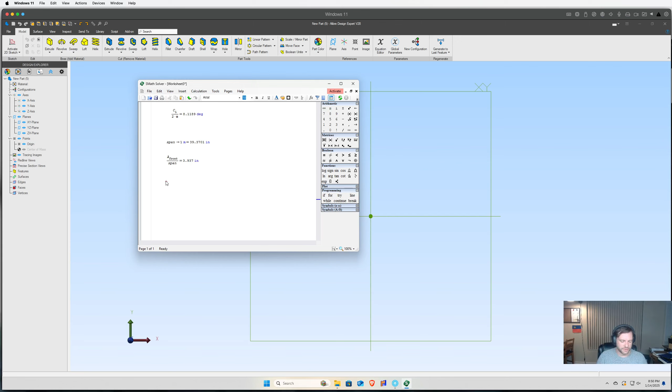And then we got to think, what's roughly the size of the width of the foil here? And I know just from looking around, it's not uniform. The width of the wing gets really narrow at the tip. Again, we're going to assume it's uniform right now, and we'll just say it's a thickness of the wing, thickness of the front. Actually, I should probably call this the span of the front, just to be sure, and correct that wherever I change it. And the thickness of the front, we're just going to say it's 1 centimeter, which in inches is 0.39 inches thick. Okay. So that's roughly at the thickest point.

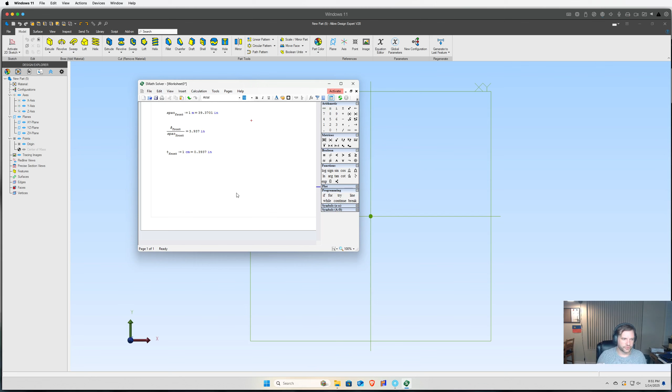And we could go look up cross sections of things and look at a whole bunch of data and try to calculate this thing exactly. But I think I'm going to take a shortcut for simplicity's sake, and we will say that we're going to have kind of a rectangular cross-section wing, because it's not going to be completely uniform at cross sections. It's gonna be thicker at the front and thinner at the rear usually to make a good airfoil or hydrofoil. So it's gonna be kind of a wedge shape, but we're gonna take a really first crack and say, you know what, we're just gonna approximate it as a rectangular beam right now.

So that's a really rough approximation, honestly. It's not great. So if you look at this wing here, edge on, it's going to kind of look more like a flat plate. And again, we're going to eventually need to correct this.

Here, let me drop this line weight so we can actually see what's going on. So we'll say this line weight is equal to 2. There we go. And I kind of want to get this to be the same. So we're looking at our model here. It's a really thin rectangular beam.

What we'll then say is that we need the moment of inertia of this thin rectangular beam, and it's going to be 1/12 times the base of the front times the height of the beam cubed, because there's a cubic relationship with that thickness. And we'll say the base of the front is the A of the front divided by span of the front. We already calculated that before.

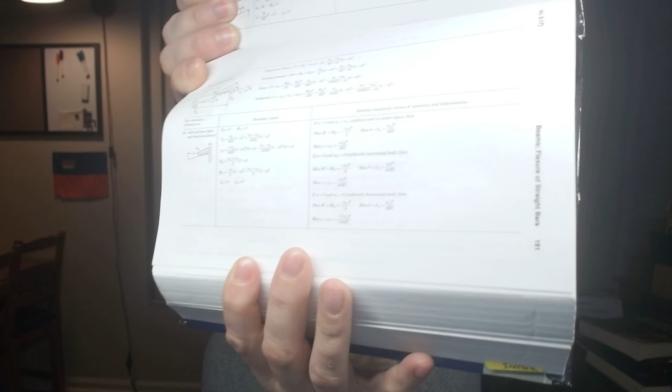Let's see if we get some camera action that can actually see. Ooh, maybe we can see. I'm holding it in the wrong place. The glare isn't great with this light, but you can get the idea.

You look up the formula for a beam in Roark's, and that tells us with a fixed beam, so really it's half the span. So I'm just going to say the half span is equal to span of the front divided by 2, just so I don't forget. It says if there's a uniform load on the entire span, then our formulas get really simple. We get our max deflection, which is what we're after, and it's really a function of the load per length.

So W, which is the load per length of the front, is going to be the weight divided by span of the front, at that first approximation. That's going to be in pound force divided by inches. It's been a long day. So 5 pound force per inch of span is what this thing is supporting.

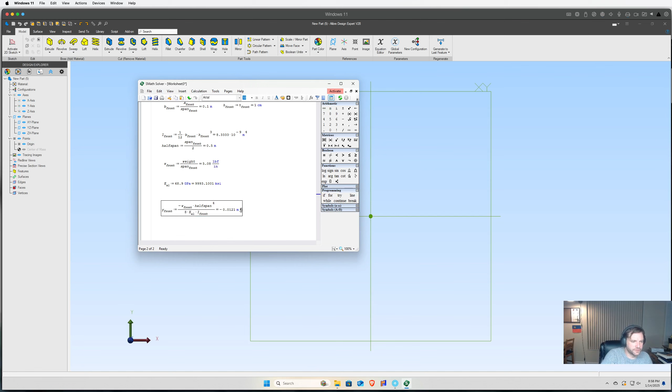All right, so that tells me right there, what's that? Oops. We get a deflection of the wingtip, effectively. We're expecting in inches. Ooh, so we get about half an inch of deflection at the wingtip from that load. So we're talking, you know, that much deflection. Is that good or is that bad? Not sure yet. Half an inch of deflection, is that going to change greatly what happens to the flow? Is that going to greatly change the shape of the wing?

And this is something you have to think about with any kind of problem. You can't just say half an inch of deflection is small. Well, if this was near a gap that was only a 1/4 inch gap or so, this would close that gap. So your model, your idea of reality is just not sufficient to understand that. And now your flow is sensitive to your deflection. That comes up in heat exchanger design and things like that, or any kind of internal flow where a small deflection could actually greatly change your whole flow.

Because this is an external flow problem where the water isn't bound usually. You're not usually flying right above the water or the ocean floor or riverbed within like a span. You are close sometimes to the surface of the water, which can matter. But let's say if you're flying this wing right below a very, very flat surface and you're half an inch below the surface of the water, those wingtips would then breach. And so that deflection of that wing would actually affect the whole flow. But that's kind of an extreme case.

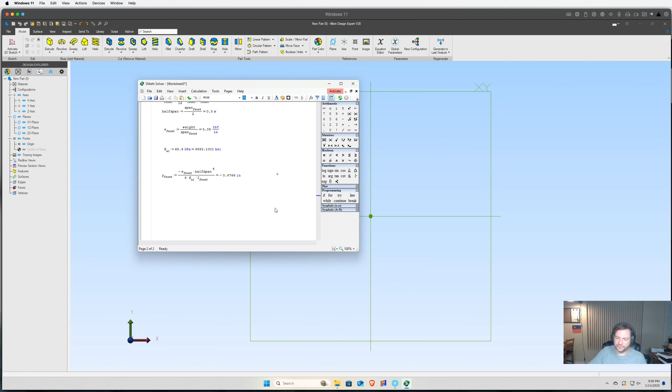We'll say maybe half an inch is okay. Maybe it's not. I don't know. I really don't know yet. We would have to go through the rest of this to figure it out. But there is something else that we want to look at, and that is another one of my favorite books. And I'm going to change the view again and try to remember to go back to the composite view here. Formulas for Natural Frequency and Mode Shape.

This is Blevins. I actually met the author of this. He is a very interesting fellow. One of my books actually got signed by him.

So we'll look at that and we'll say, well, we'll get the same situation where we have a simple beam. It's fixed on one end and it's free on the other, also using the half span, and we'll find its natural frequency. And I'll look at the first modal frequency of the front. So that's F1. We'll just call that F1 of the front. And that's going to be something called lambda 1 of the front, and we take the square of that. This is just a formula straight from the book.

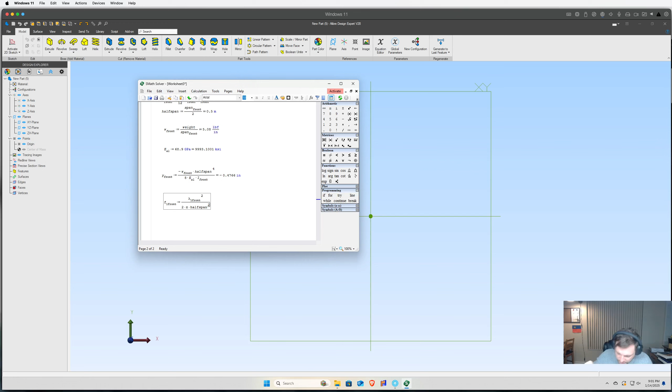Over 2 times pi times the length, which is going to be the half span, squared. And then all this, you get to multiply, if I do the multiplication right, by the square root of E, which we're saying is, I did something weird there, E of aluminum times I of the front, which is the moment of inertia of the front. And that's going to be divided by M of the front.

And it will not compute it because we didn't tell it what lambda was nor what M of the front was. So, excuse me. Lambda is effectively just a shape factor for determining the frequency. And so what that is, it's lambda 1 of the front. It's for a clamp-free beam, so that's 1.875. There's some more digits there, doesn't really matter.

So we got that. Now we have to define M. And M is simply the mass per unit length of the beam. And for that, I need to know what the density of aluminum is. So density of aluminum, I can go back to the website here. And where did we define density? Boom. So 2.7 grams per cubic centimeter.

I need to make sure, this is the one thing I don't like: MathCAD automatically converts to units. This one doesn't, and it takes me a little bit to get used to remembering to always hit tab afterwards. So there we go. Hopefully that matches. 0.0975. Yes, it matches. Okay, we're good.

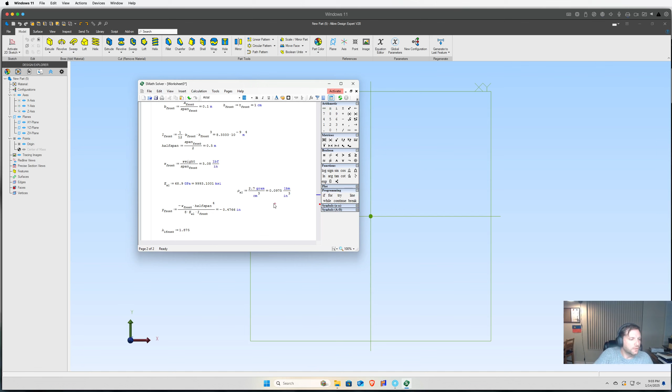So mass of the front. What that means is mass per unit length. So it's a rectangle. So mass of the front, we're going to say that's going to be the T of the front times the, what did we say, the base of the front, and then times the density of aluminum. So that should give us a weight per unit length. And bam, right there, we got a frequency that we expect, 32.6 hertz. When this thing is flying around, that thing is going to vibrate at 32.6 hertz.

Now that's just a bending mode. And that is a really simple approximation here. This is just this flapping mode of this structure. What that ignores is anything else going on. And I'm only looking at the front wing. This whole thing could basically shake around this mast, right? You could also get a torsional mode.

So this really thin shape here, instead of just flapping up and down and moving vertically, could actually do this whole twisty thing and have this torsional mode like this. It could move like this, but we're only looking at this flapping mode right now. Okay, that's what we just calculated for this really simplistic case. And is this okay? I don't know. It seems kind of low. 32 hertz. Pretty low, it seems.

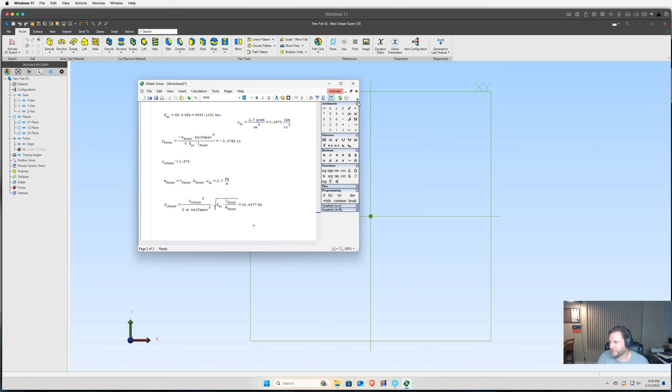So, not entirely sure. We will look at another book by Blevins, this is the one, Flow-Induced Vibration. I should have it here. Yeah. This one's actually signed by the author, Mr. Blevins. Very nice of him.

And what we need to do is look at something called the Strouhal number. Effectively what we have is for various Reynolds numbers, we have various shapes. We have a Strouhal number, which we can use to then calculate what happens here. Basically, Strouhal number is a prediction of the frequency of when you're going to get vortex shedding. So in general, a lot of these come down to experimental data, and it doesn't really vary that much.

And because we're taking a lot of approximations here, I mean, this is a beam formula for a flat plate. We're ignoring torsional modes. We're ignoring the effect of the wingtips. Our guess here, we just want to be in the right ballpark. We're not going to get this exactly anyways, especially at this first approximation. So the Strouhal number of the front, we're just going to say is 0.2, because it's kind of where you end up with a lot of this book approximation stuff.

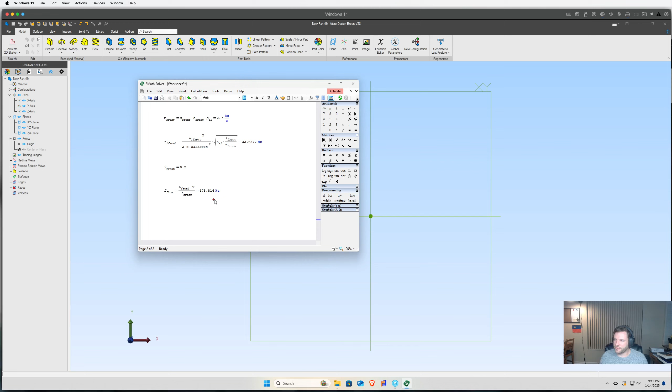All right, that's all I have for now. Next we're going to try to model this in 3D very simply, and I just realized I wasn't showing you where we had changed it from 10 to 20 miles an hour. But next we'll throw a finite element simulation at this, see how close this gets to our first CAD and finite element simulation, and then refine our little hand calcs to get a better idea of what's going on with this design and what is actually important. Thank you all.